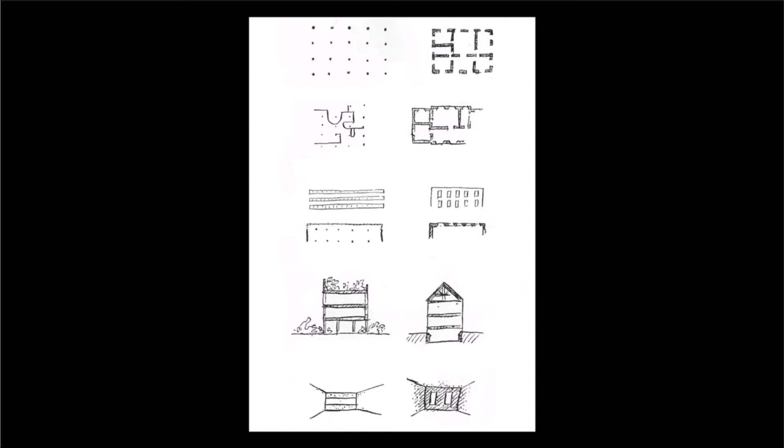So in this video I'm gonna talk about why the 5 points of architecture, how Le Corbusier called it, are nonsense. So in the meaning they're either not new or they don't make too much sense. So this is a sketch from Le Corbusier from the book Vers une architecture from 1923, where he presented the 5 points of architecture in a book before they were separately presented in texts that he published. But in the book Vers une architecture, he explained them thoroughly.

And here I wrote the terms on the left side myself, on the right side sketches from Le Corbusier. So I will go through these 5 points in this video step by step and explain why they're either not new or they don't really make too much sense. So a critical view on that. So that's Le Corbusier, how we know him, right? The famous look that he has. And this is a picture when he was younger, probably around the time when he published that book, 1923.

So the first fact, that some of you might know, but that's not what this video is about, is that actually they were not really from him. So the ideas were already there before. And they were published 1917 in that book, Une Cité industrielle, that means industrial city, from Tony Garnier. And this guy didn't become famous with that at all. So he invented these thoughts already around 1900, Tony Garnier, and then published it 1917 in this book.

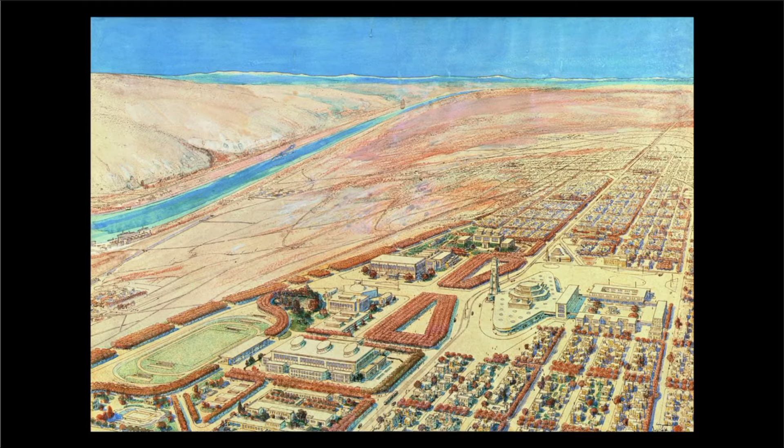And this is Tony Garnier. And that guy didn't become famous with that at all. But these 5 points, or the content of it, this is how the Cité industrielle should look like, funny, no? Already included in this book, and Le Corbusier kind of extracted it from there and published it under his authorship. So, but that's not what this video is about. So we can also say Le Corbusier was definitely better in marketing to display it like that.

Like on the right side, you see the old, the overcome system, on the left, the new, with these clear sketches. So one of the strengths of Le Corbusier, besides I still think he was a good architect and a remarkable visionary, is clearly that he was very good in marketing and also self-marketing, right? How he showed himself everywhere with a hat and the fly. But he was really good in marketing. That means he took this idea and displayed it so clearly that everyone can understand it, right? So that's one of his strengths.

And this is also the classic tale of the modern time, same like the Bauhaus, right? Although Le Corbusier was never part of the Bauhaus. So the old system on the right side, let's say the overcome system, these people before modern times, they just didn't know it better. So the dumb guys, and then the new system on the left. So everyone understands that. That's also the tale or the story of the Bauhaus, right? This Hollywood tale, like the good and the bad, or here the dumb and then the new system.

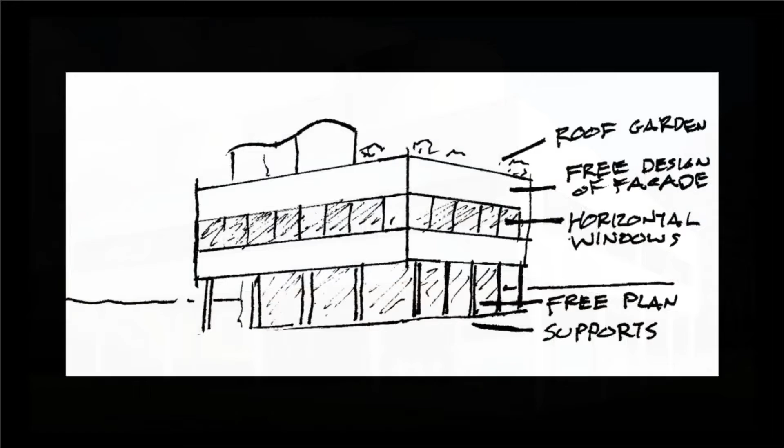So these 5 points are most clearly displayed in this building, right? The famous Villa Savoye in Poissy, west of Paris. And this is the ideal translation of these theoretical 5 points into a building. This is from 1929. And here it's written again how they are applied, right? The roof garden, of course, on top, the free facade design, which in this case includes the horizontal windows, and then the free plan, and the main elements are the supports. So he called it pilotis in French, basically the columns.

So now we go through these 5 points step by step. And actually the first 3 are already in one group, because it all comes down to the pilotis, so the columns that are arranged in a grid. And point 2, the free ground plan, basically means that the walls, in this case the inner walls, are not supporting, so you can arrange them freely around the columns. And then the free facade is basically kind of a curtain wall, which is also due to the columns or pilotis that support the loads. So these 3 you can see together.

And the following slides I took from a lecture I gave in university about construction. So you can see that this is actually not new. So here I put this beautiful cave on the left side that should represent any kind of cave. Because even in the very early settlements of humans, we have these 2 ways to bring the load down. So we have on the one hand the massive or solid construction, and on the other hand the frame construction. And as you can see, the caves, I mean, humans found them, right?

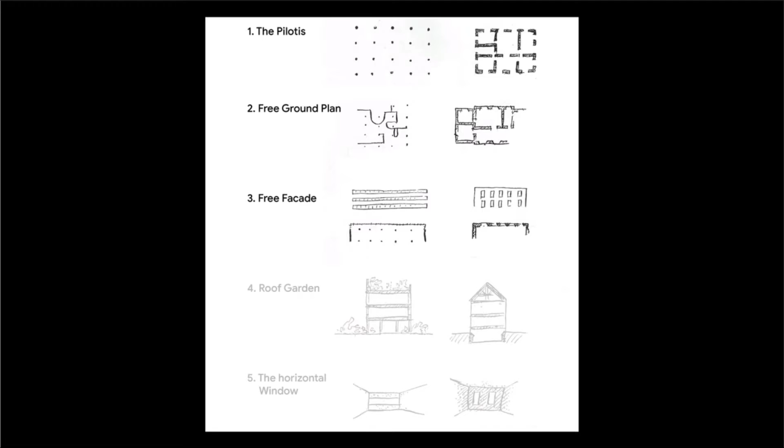We didn't build the caves, but they are massive. So the ceiling and the walls are massive or load bearing. And then, as you can see on the right side, the tent is basically the early origin of a frame construction already. So what Le Corbusier does actually, on the right side, he shows basically a massive wall construction opposed to the new frame construction. It's basically a frame construction.

And as I will show in this video here, they exist already for a long time in wood. So now he used steel concrete in the Villa Savoye, and it's mainly the steel that makes it possible that these columns are so thin. But actually the system exists for thousands of years, in the system of wood.

So as you see here, the early settlements on the left, the cave is the archetype of a massive construction, although these caves were found by humans and not built. But then on the right side, you see the early tent. So that basically started, I guess, when humans just put an animal fur over branches from a tree. So they used the tree as a frame and then hung the fur over it. So it's the early origin of a frame construction.

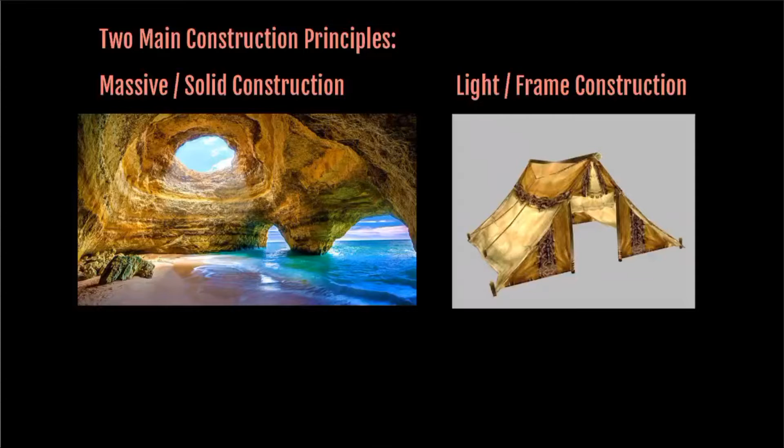And here are the developments then. These are both reconstructions, so they are new buildings in this picture. On the left side, you see a reconstruction of an early round house from clay. First it was clay, and later the clay was sun-dried, which is called adobe. And then these adobes were baked in the oven, which then became the brick. So the brick house is a development from the clay house, and at the beginning they were roundish. So in this left reconstruction, you can see how probably the early houses looked.

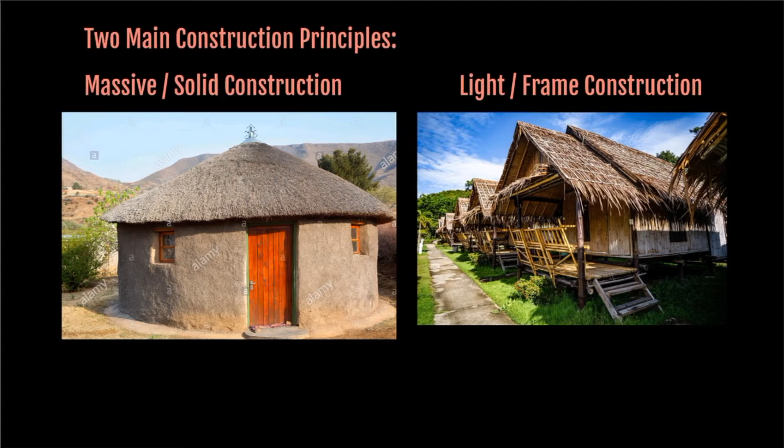That means the massive construction means that the load from the ceiling is brought down to the ground via the wall. So the wall is load bearing. And then on the other hand, as you can see in these beautiful holiday houses, we always had frame construction. In the following slides, you see more examples. Nowadays we still have it in Southeast Asia in the so-called pile dwelling. So here you have two contemporary examples, but these are like 1000-year-old traditions of wooden houses, and they are frame construction.

That's basically the principle of the Villa Savoye. So technically, you could build the Villa Savoye in wood. You just need to make all dimensions a bit thicker, because wood cannot take as many loads as steel or steel concrete. But the system is the same. So what he basically does in his 5 points, he opposes the massive construction, which, as I said, always existed, to the frame construction, which exists for a very long time. And as you can see here, Southeast Asian pile dwellings still do it nowadays.

It was bamboo before, and you basically erect a grid in bamboo, and then there are gaps in between, and you fill them with something, probably also light bamboo in another way, or nowadays it's wood, but it's the separation of the load-bearing elements, in this case columns and beams in wood, and the room separating elements, so inner walls and outer walls.

And technically you could have also made huge glass windows in these houses, because the walls, as I said, are not load bearing. The load from the roof is brought down to the ground via beams and columns, and this is a so-called frame construction or light construction, and this exists for hundreds and thousands of years. So it's nothing new that he displayed there. He just worked it out so clearly and translated it very clearly in this Villa Savoye.

But the system, I mean, Southeast Asian pile dwellings, and as you see on the right side, they are also usually lifted over the ground. This one is over the water, but nowadays in Thailand they even build them new, so they are still 2 or 3 meters over the ground, as they always were, and they use the space under the house as storage or for the chickens or something. So they were always lifted over the ground, as the Villa Savoye is.

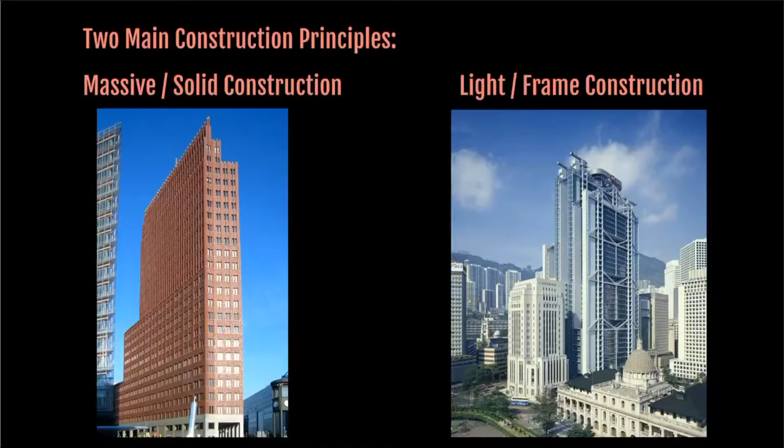And I put this Norman Foster building because in this case the frame is outside and visible. Most of the skyscrapers, as you know, have the frame system inside, so you just see a glass facade mostly. But it's the same principle. And here you see on the material overview, on the left side, so these are all new buildings, right? On the left side, Louis Kahn. It's just, I think, the perfect form of brick architecture.

It's from the 1970s, and bricks are an example of massive or solid construction because they cannot take pulling forces. It will lead too far now, but it's about pulling and pushing forces. So massive construction can bring the forces down via pushing forces, and wood can absorb both. But wooden constructions are usually always frame construction. So on the right side, this Thailand house, again, a new one, but it has been there for hundreds of years, frame construction in wood, principle of Villa Savoye as well.

And on the bottom, you see concrete on the left, because the Romans even knew concrete, but they didn't know iron or steel. So in that time, concrete was only possible for massive construction. That means you could only bring the forces down via volume, which absorbs pushing forces and no pulling forces. Adding the iron in the 19th century and the steel in the 20th century made it possible to create steel concrete. So steel concrete is the perfect material where you can create everything out of it because you can absorb pushing and pulling forces. And by that, moment, so in architecture we call it moment.

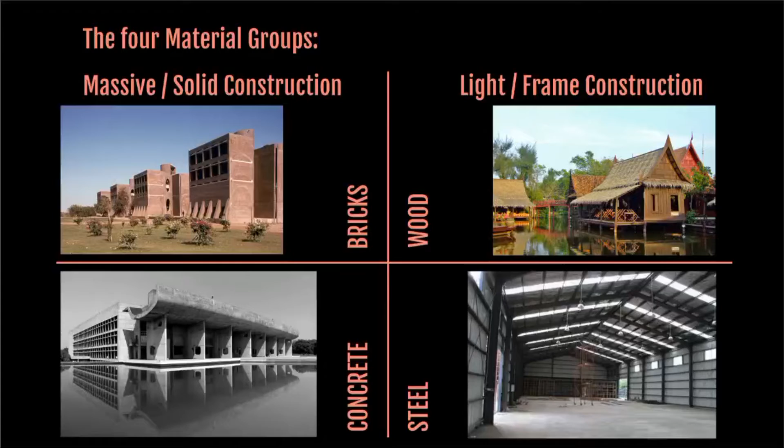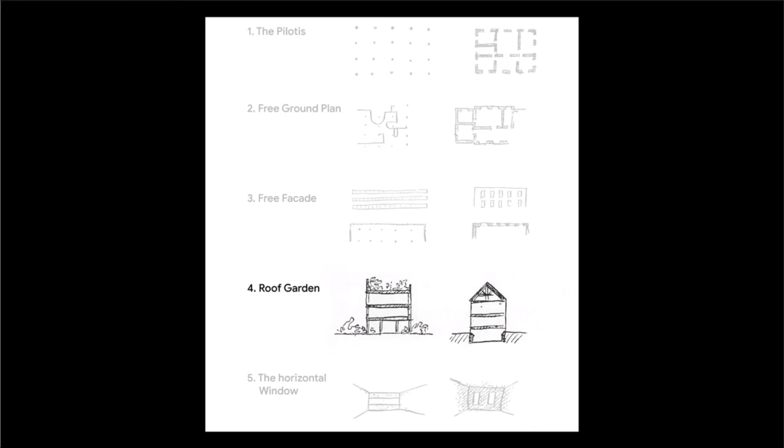Yeah, and the next point is even more ridiculous, the roof garden. And that makes me a bit angry because also that's not something new. So here you have again this modern architecture tale: on the right side, the stupid old system, the guys didn't know it better. And on the left, the new intelligent modernity, right? So we make a flat roof and basically can use the space on the house as a roof garden. But that's also not new.

So at the Villa Savoye, there's a lot of rain. That's why houses traditionally had these kinds of roofs, same as in Germany. And tada, also in the Villa Savoye, it rained inside. They could never fix the roof, so the rain was dripping in the bedroom until now. So flat roofs don't make too much sense in rainy areas, in my opinion. But it's nothing new. Even the first settlements had flat roofs. It's a regional thing, but he presented it as something totally new.

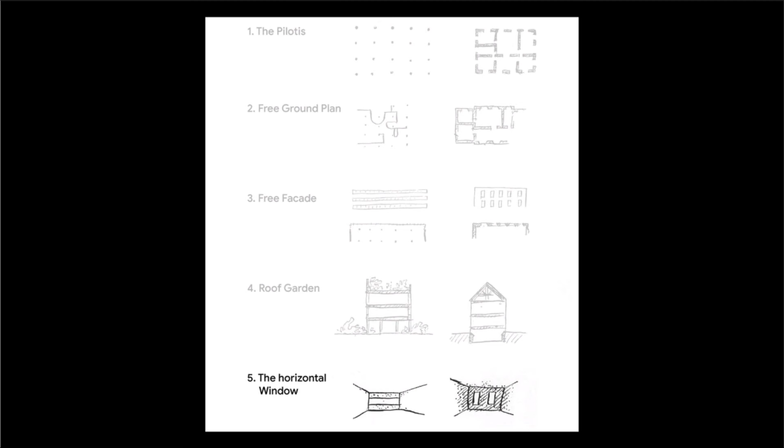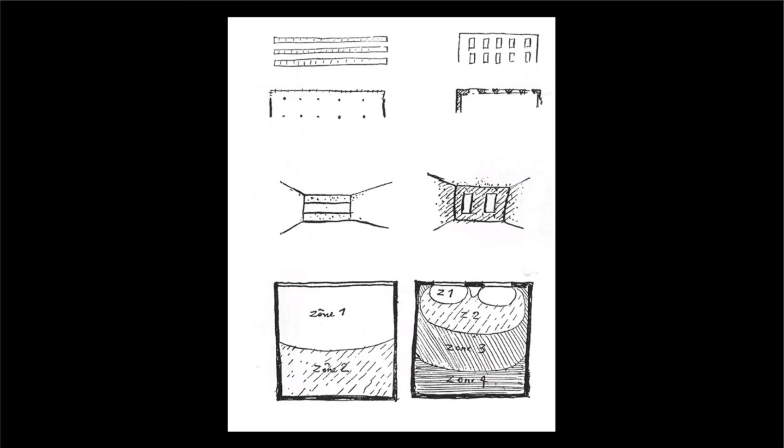And then the last point is the most ridiculous: these horizontal windows. This is a sketch again from the same book, Vers une architecture from 1923, drawn by Le Corbusier. And on the top side, you see again the curtain wall. If you have a curtain wall, you can kind of do in the facade whatever you want. And technically the Southeast Asian pile building in wood could also have been erected with such a facade. By the way, the new thing of the Villa Savoye is that they put the facade and also the interior walls in different layers than the column grid.

But that doesn't make too much sense, because then you have the columns in the way all the time inside, so you run against them. In the Southeast Asian house, they usually fill the gap between the columns, which is the natural intuition, but still you could move them wherever you want. Villa Savoye separates the position of the inside wall and the curtain wall, which has the effect that you have the columns in your living room.

But nevertheless, of course, you can design the facade however you want if the columns, or the Southeast Asian bamboo trunks which bring down the loads in the frame construction, are load bearing. So on the left side, he said, then we can also do horizontal windows. I mean, you can, fine. But what he draws there on the bottom is simply wrong. On the bottom of this page, that should be a floor plan. And every architecture student who took just one lecture or one seminar in light design knows that what he draws is wrong.

So, he's known to be the most remarkable architect of the 20th century, and he was a good architect, but the sketch is still wrong. On the right side, the old system, he says these vertical windows basically create a dark room. He illustrated it by 4 zones. And then the new window on the left creates a very bright room, right? That's why he drew 2 zones. That's from his book; these were his sketches, by Le Corbusier in 1923.

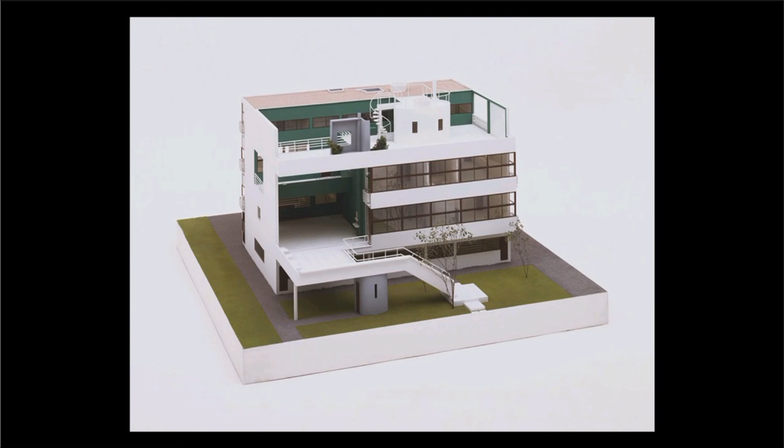So here's the front, and on the back you see he just makes larger windows. And again, this lifting up of the building. There's now free space under the building, and I feel like if you make a connection to the garden, it would make more sense than these closed windows. There's no real relationship between the house and the garden. It's just a stair going down, right? So I think he could have connected his buildings more to the surroundings, in my opinion. But the floor plans are great. You should take a look at the Villa Stein in Garches. It's very interesting.

And in the end, as I said before, he kept on using these 5 points wherever he could, like in India, for example, in the Chandigarh buildings, but not in all of them. This is the famous, very sculptural church in France, Ronchamp. It's a very sculptural building where he works a lot with the light. These 5 points are not applied at all. So he didn't use them in all buildings. That's from his late works, right?

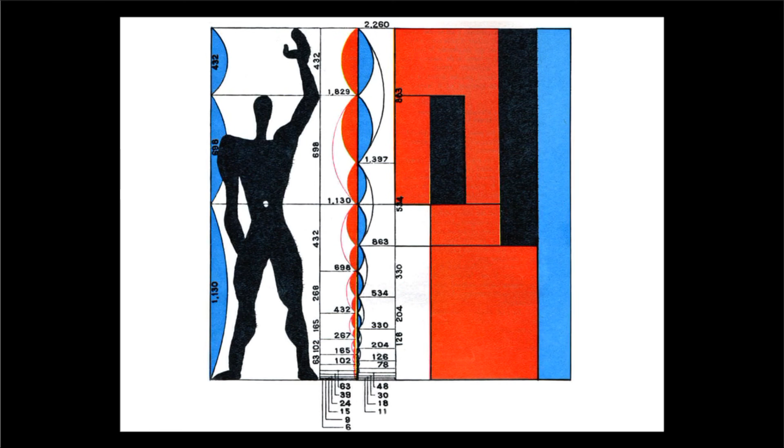And this one is the famous Modulor. I think I will make another video about that. This is another example of a theory which, if you understand it, really does not work. It does not make much sense, but I will make another video about that. So the Modulor also simply does not work. And it's again an example where I think Le Corbusier was a great architect despite his theories, but not so much because of them.